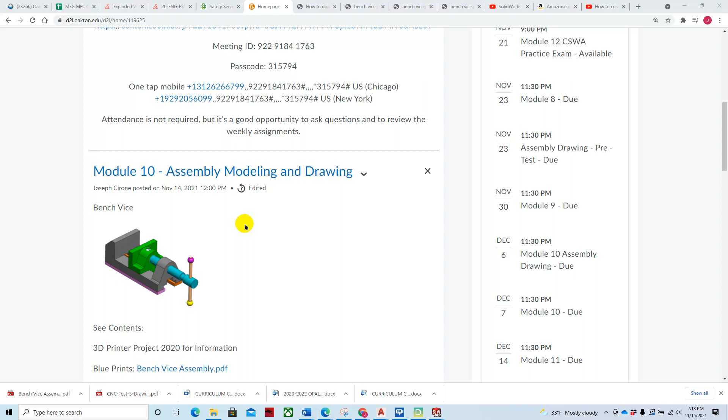And I've made videos for a number of components. Today I'm going to make a video for the screw bar and the bar globes. So as we take a look at the screw bar, this is a metric drawing. It's 104 millimeters long with a diameter of 4 and 6 millimeters.

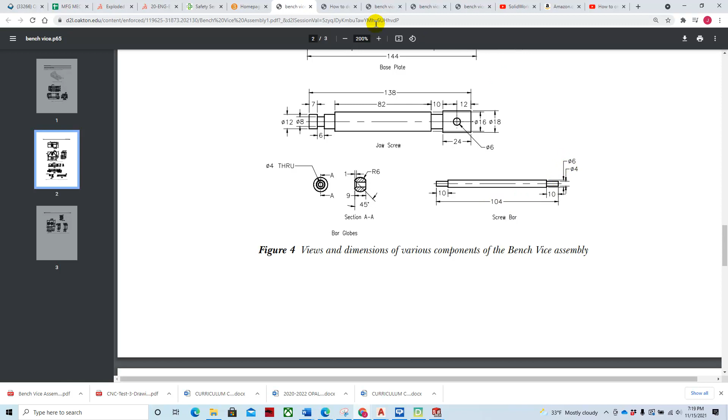There's a couple of different ways that we can make this. We can either make this as a revolve and draw half of the components, or we could just stack up the components one on top of another. And I think I'm kind of inclined to do it as a revolve. So let's get started. We're going to go to SolidWorks,

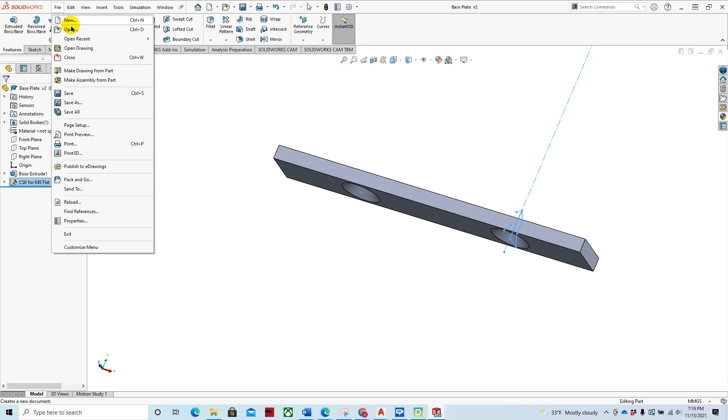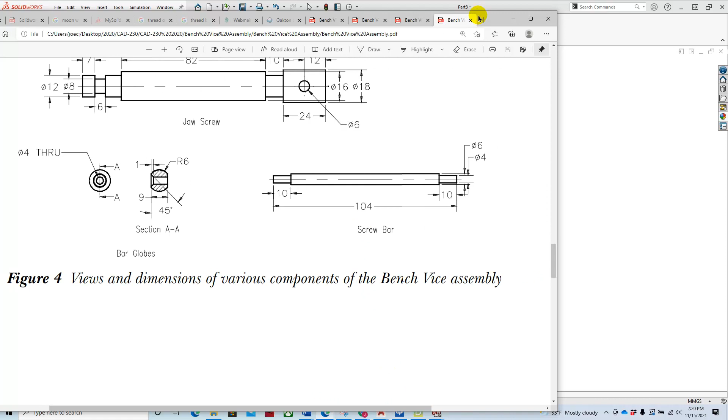and I'm going to start a new file, new part. I'm going to OK that. And I'm going to get rid of this little swatch here, plain white. We're going to go to millimeters. And then we're going to take a look at our component here. And we're going to be working on the screw bar. And so we'll draw that on the top plane.

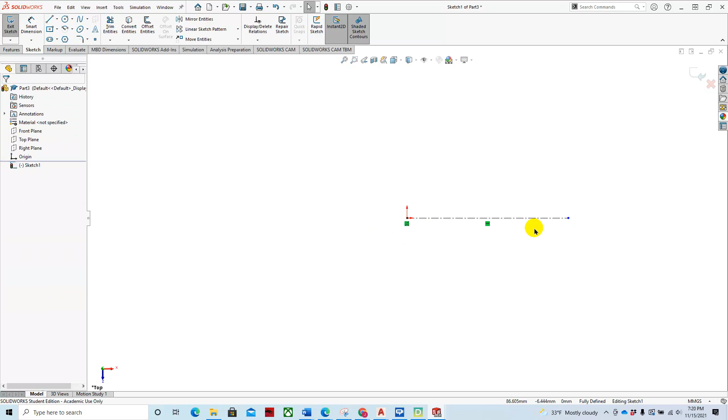We'll start a sketch. We'll create a center line. And we'll make that center line just over 100 with a horizontal constraint. And then what we'll do is we'll go through and create the geometry for that. And it's not a real big component, so this would be like around 2. I try to make them somewhat in perspective.

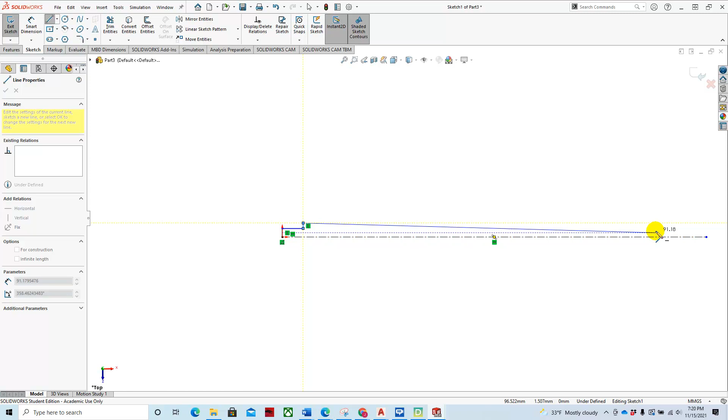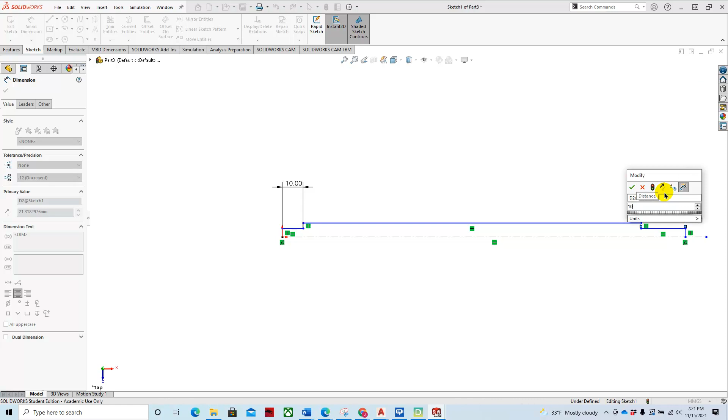We'll hit escape on that. Then we'll go through and we'll start. Let's make this 10. And we'll make this one 10. And in the middle, we'll make this 104.

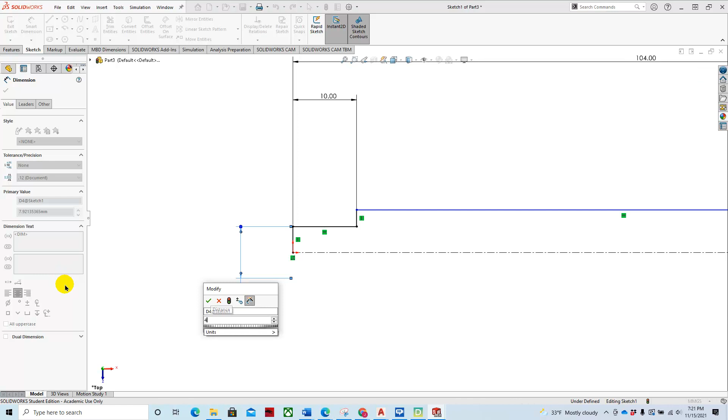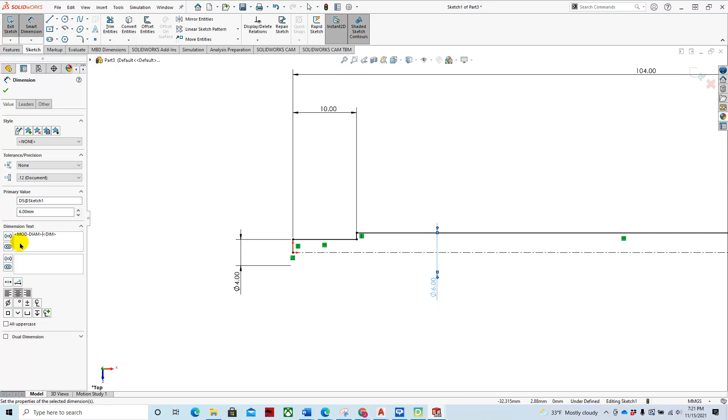We'll set up our diameter values of 4. We'll put a diameter symbol in front of that. Since we're on the other side of the center line, it's a diameter dimension. And we'll do another one that's going to be 6. Again, we'll add the diameter dimension. And we need to do the same on this end here.

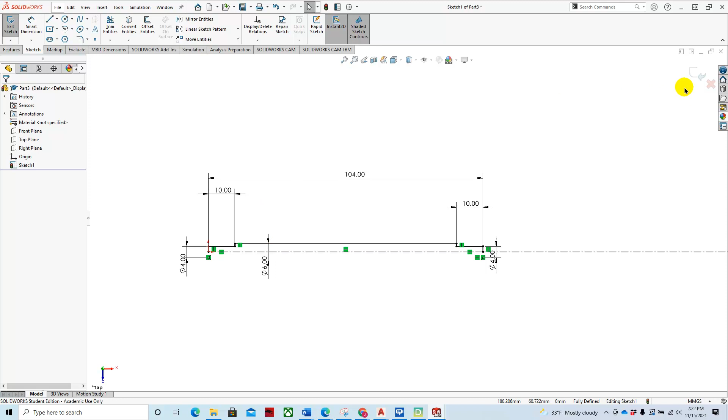Okay, our part is fully defined in our sketch. So we'll green check mark this, and then we'll revolve it. And we'll revolve it around the center line. We'll go 360, we'll say OK, and then we'll save this as screw bar.

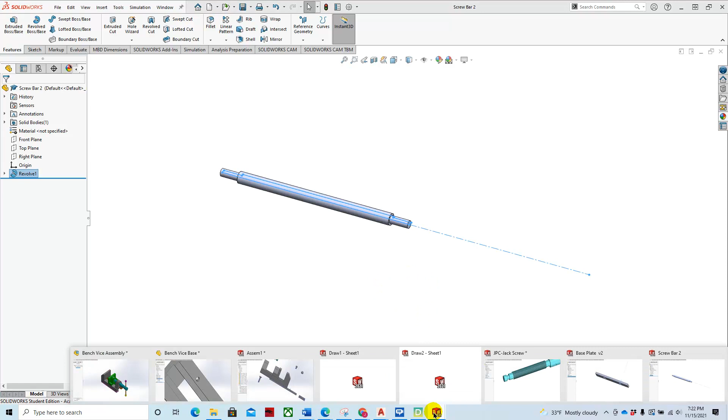All right, now that we have that component, we can insert it into our assembly. So we'll go to our assembly, and here's our assembly. We've got a screw bar in there already. As we look at this, we can start to make some of the mates for it. So if I bring this out here like this, and then if we want to go through and add another mate, I can go through.

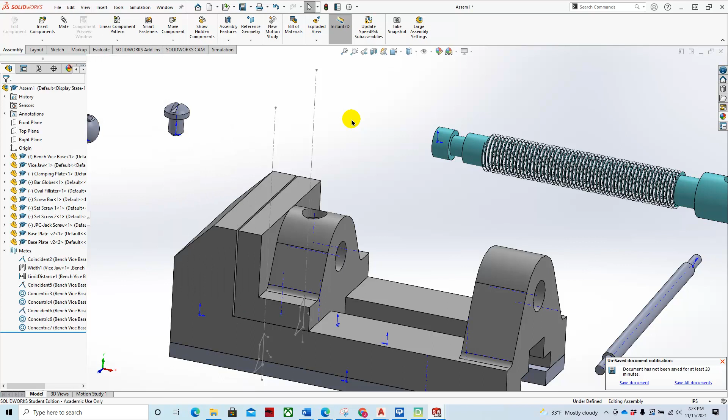I like to go under View, Hide and Show, make sure that the axes and the temporary axes are shown so that we can mate to those things. And then if we mate from this temporary axis right here to the temporary axes, I know we have one here.

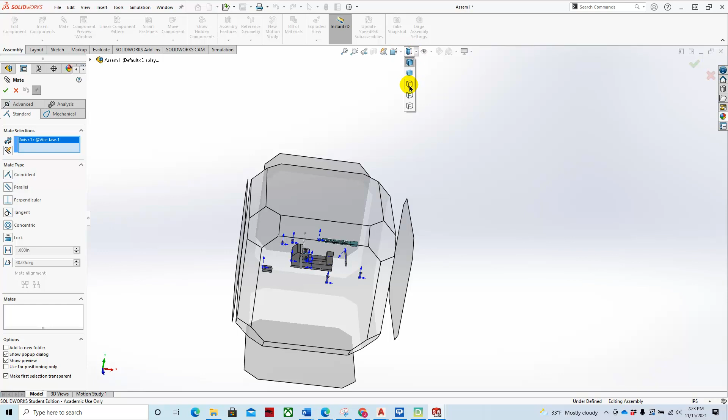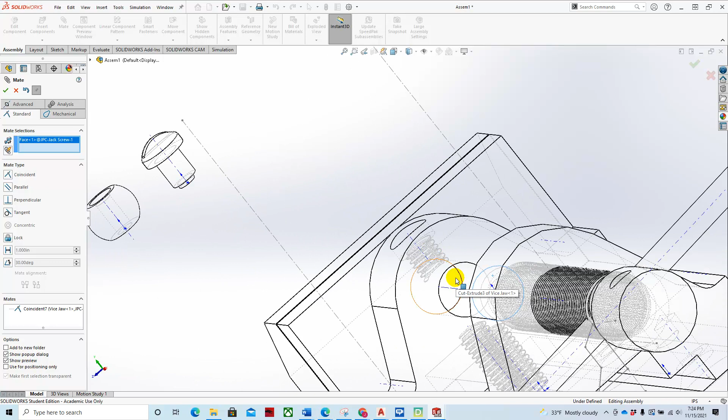Great. And then we'll go through and we'll mate this also, and we'll mate from the end of this part to the end, and we'll update this a little bit. And so as we're looking at that, you can see that it's not exactly in the middle, and so we're going to offset that just a little bit. And so we'll say, let's say 0.5, let's say 0.05,

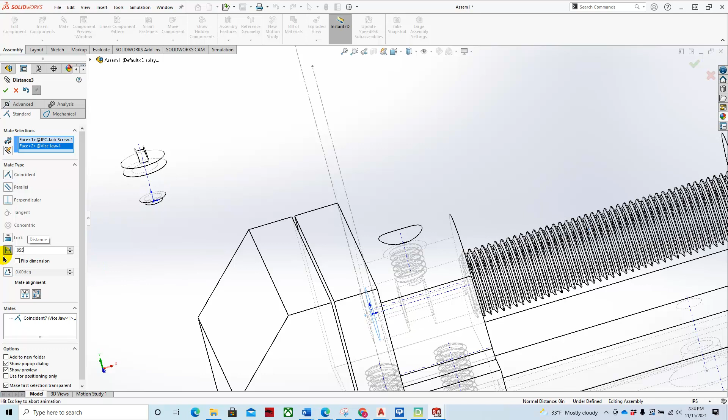and then we could say 0.04, 0.055, 0.06, and that looks about right as far as that goes, being in the center. We could probably tweak that a little bit more, but that's close enough for our purposes right now.

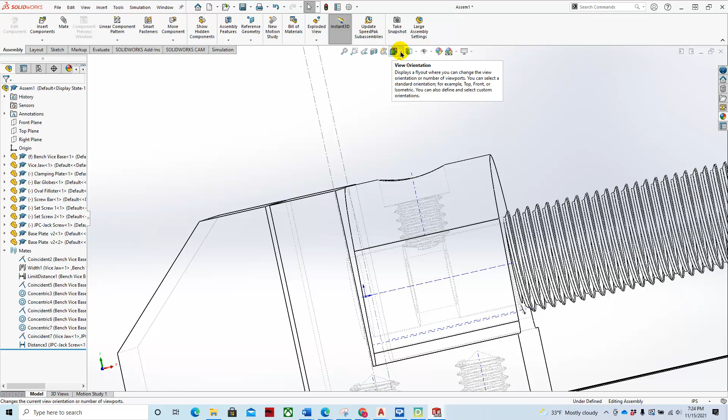And so now that we have that mated in there, let's go back to a display style where we can see everything. Very good. And then we have these other bars. I'm going to take this one out, and I'm going to insert my other component. So here's my new screw bar.

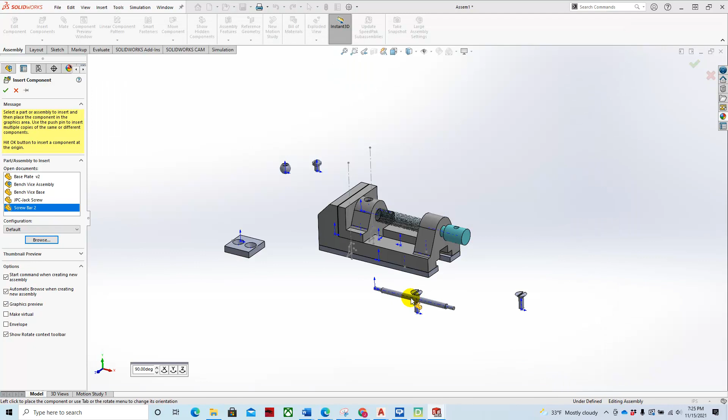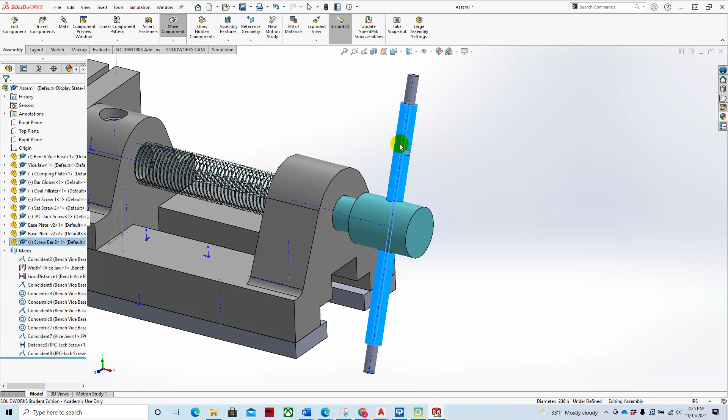I'll open that, and then I'll drop it right here, and then I'll go through and set that one up to be able to mate that as well. And so we'll go through and we'll say mate, and we'll go from here to here, mate that to our temporary axes, and then we can push that up a little bit and say green check mark. And we can set that up.

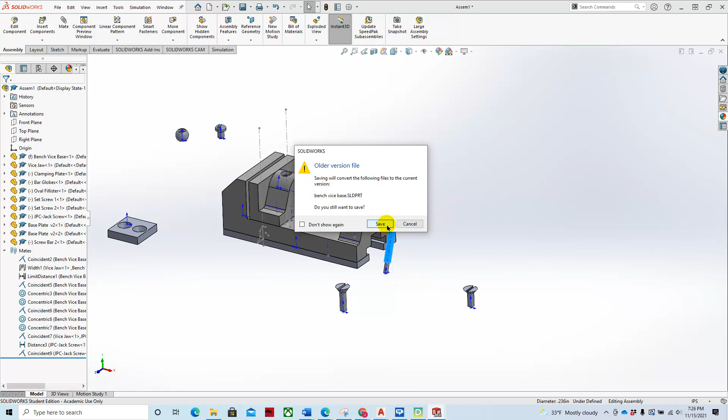All right, so that completes our video on how to create the screw bar and to put a basic mate in for that. I'm going to save this component. And that completes this video.